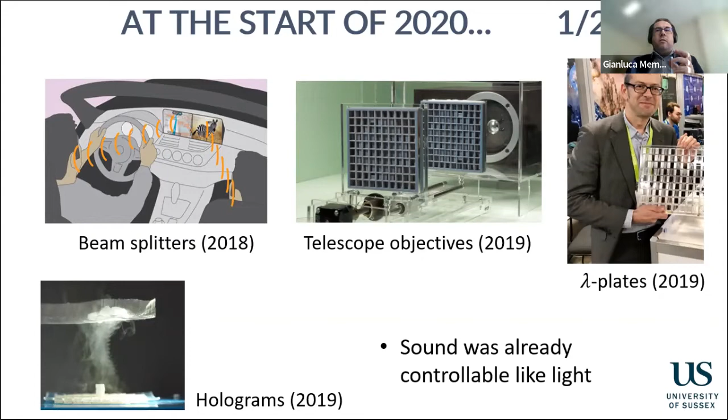And we had already realized that if metamaterials give control, then what we wanted as a company was to give control to the people whose needs in terms of acoustics management are not covered by legislation. But still, especially if they are affected by noise at work or at the office, it has a negative impact on their well-being.

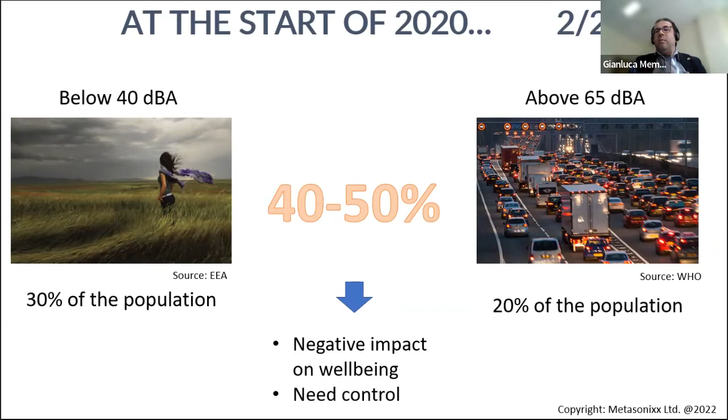And then lockdown arrived. You might remember those evenings when we were out on the front door. I remember being there with my kids, making noise for the people who were fighting the start of a war, which is still ongoing, against the virus.

And we realized this changed us. We realized that we wanted to do something now, we wanted to actually help, we wanted to be part of the war. Instead of giving noise to hospitals, we wanted to give them the benefit of silence if we could. So what we did is we spoke with KTN, and whenever you have an idea, that's the best people to talk to. They encouraged us to submit a proposal to Innovate UK. The story I'm telling you about is what came out of that.

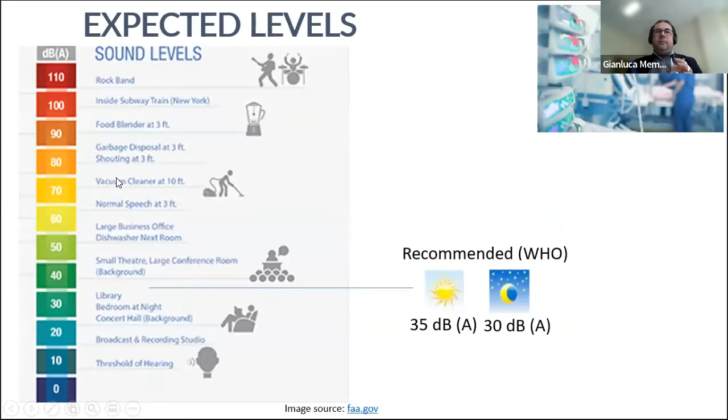Hospitals are noisy places, even if the recommended levels are very low. Low in the sense that the levels in dBs — decibel being the scale that you use to measure and compare noises or sounds, a non-linear scale — 35 dBs on average is equivalent to the sound or environment in a library where there is only the occasional shh. And if there are too many shh, then you move to a small theater or a large conference room.

If you have spent time in hospital, you know that's not the reality. In fact, a lot of studies have shown that the levels are much higher. There's a review summarizing studies made between 2015 and 2021, which says that the levels go as high as shouting at 1 meter away, or even sometimes as loud as a rock band.

My small contribution to that was a study I did in 2014 in two London hospitals. I was aware that was an issue, so one night while I was clapping, I phoned the clinicians I was talking to, first because I wanted to re-establish a link with these people who were fighting for us, but also because I wanted to know what had changed. And they told me it's even worse.

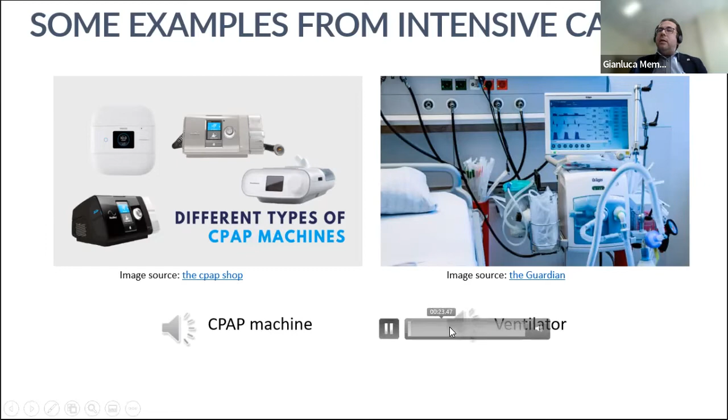Now imagine having that all the time, and imagine having a lot of those ventilators in a row. You can barely hear my voice talking. And if you add to that a CPAP machine or something with an alarm, as I was saying, then this becomes unbearable. So if you measure the noise made by a ventilator at the patient's head...

...and you estimate 10 ventilators in a standard COVID ward, or wards which were transformed into COVID wards at the start because we were unprepared to cope with the issues, you get levels similar to what you get along the M25 motorway, both day and night.

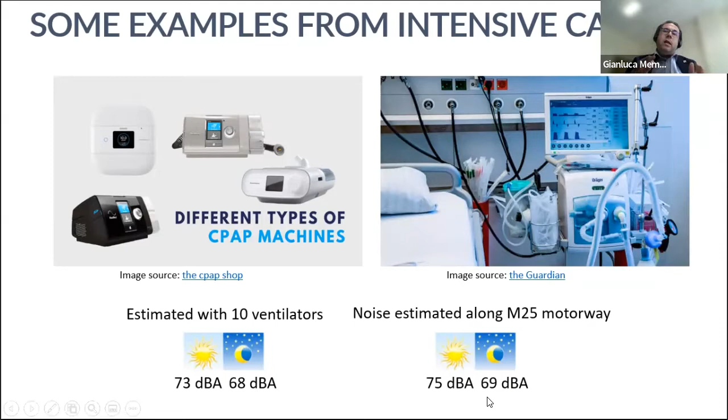So imagine working in a place like that all the time. This has an impact both on patients, because obviously they cannot sleep well. It has a proven impact on increased heart rate and blood pressure, and this also leads to delayed recovery.

But it also has an impact on staff. What you see here is the result of a survey made by the Parliament's Special Committee on the burnout of NHS staff. You can see that 2021 was clearly a difficult year. But the interesting bit, if you compare those numbers, is that the word 'noise' starts appearing more and more.

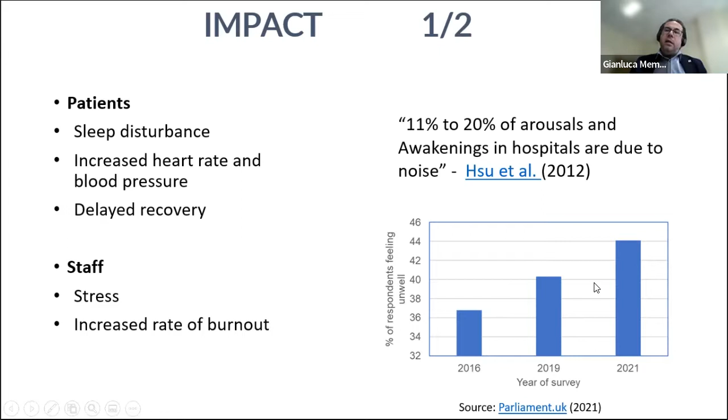The fact that noise is something you really don't want during the treatment of the sick is something that apparently has been known for a long time. There's a sentence allegedly attributed to Florence Nightingale in 1859, where she says that noise, unnecessary noise, is the most cruel abuse of care. Now, without talking, without some noises, you cannot save lives, so this is absolutely paramount.

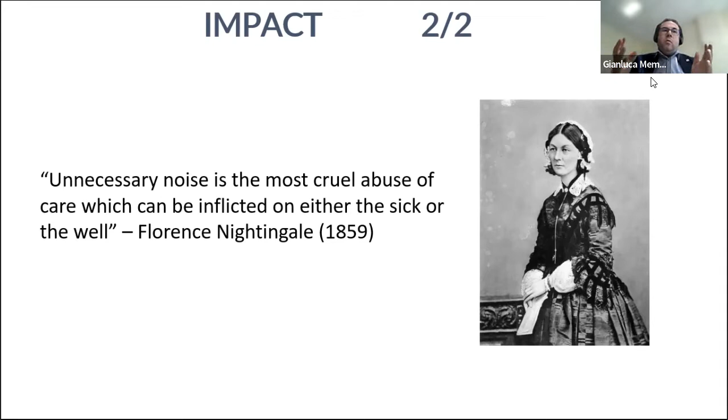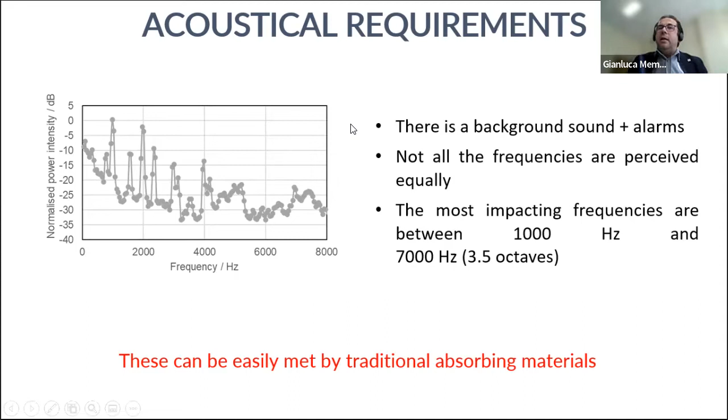So if you imagine sorting this out, you can do that with a classical solution: put an absorbing material in between, a very heavy piece of material between the ventilator and the patient. The problem is this isn't clinically doable, because anything you put between the patient and the instruments needs to be removed as quickly as possible, since you need to access the patient if needed.

Also, that was a very important point: they wanted something which would not make the patient feel like being in a coffin, so ideally something transparent. And the last requirement was that it needed to be cleanable as quickly as possible and as light as possible, so that nurses wouldn't need to call special people to manage those.

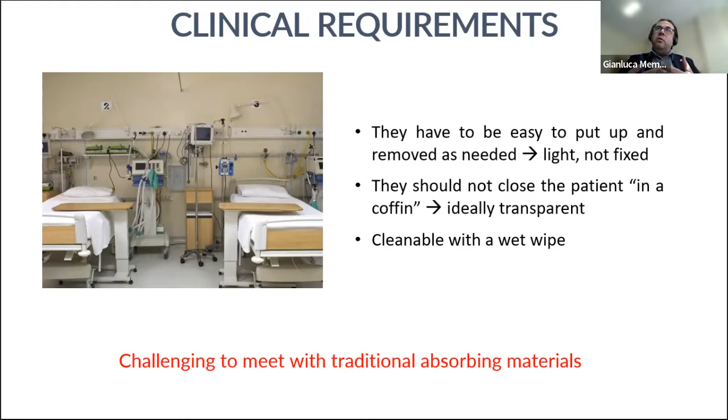Metamaterials, we thought, can do this. So for us, when I talk about Metamaterials at Metasonixx, I talk about Sonoblind Panels. These are panels which start from standard materials, or poor materials you could call them - wood, plastic, metal, paper in some cases. And then you add a bit of the patented IP and you get objects which either cancel noise or manipulate sound.

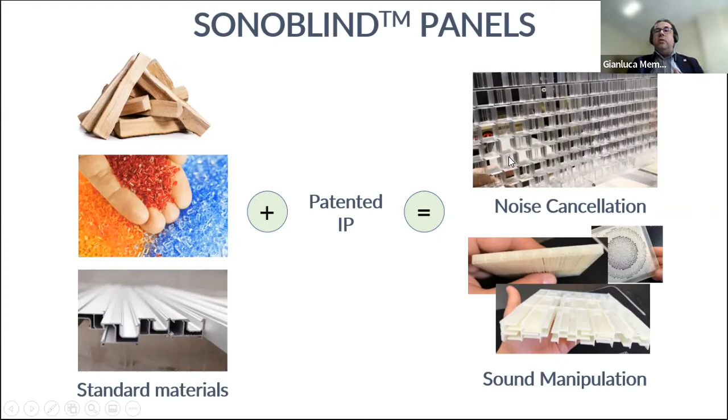So we devised in this project 3 types of panels. One of them is a panel which lets a lot of air through and is very, very effective on specific frequencies - imagine that tuned to the alarms. And believe it or not, there are some key frequencies which work for this type of instruments. So for those, we didn't look at transparency because we imagined them around the ventilator.

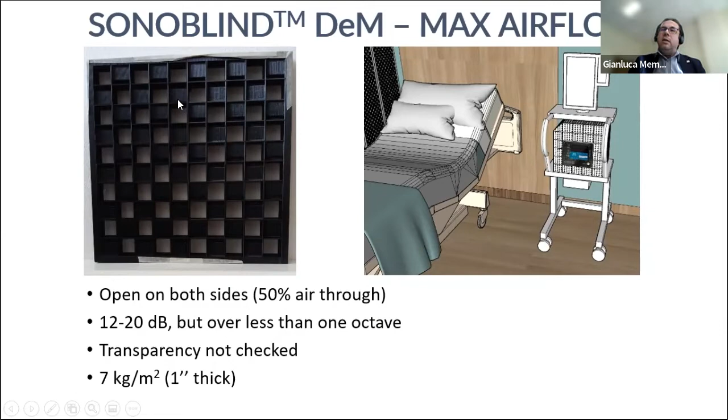These are very light because, as you can see here, most of the space is empty, and the physics which allow this to cancel out the sound is that actually the sound which goes through this and the sound which goes through this in a checkerboard interact on the other side and cancel out.

Then we took the idea of making something transparent, and also that allowed air through - remember the requirements, not in a coffin. So we designed panels which allowed a bit of air through and were more wideband, so more appropriate for the type of noises that you want to silence from one bed to the other, and also in terms of acoustic comfort. However, they are much heavier in terms of weight.

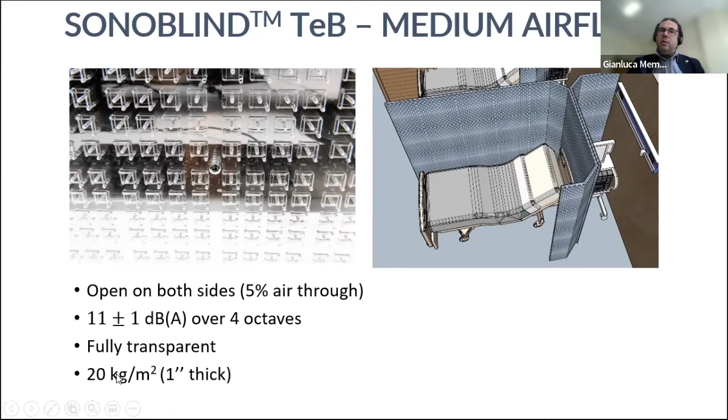And this brought us to design a third type of panel, which instead has no air through, but is semi-transparent, and is also closed on one side.

Now, strangely enough, this was the one that we imagined as on movable screens or on wheels, just like a lot of the equipment that you find in hospitals, so that you can move it around very quickly. And if the weight is allowed, you can do it with a finger.

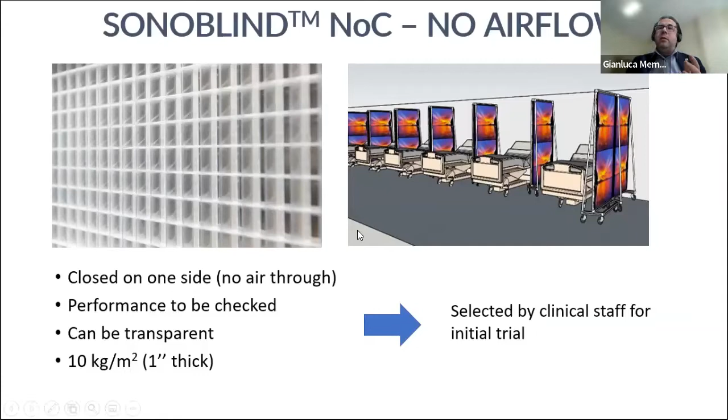So this was the first type of panels that I went to measure the first time in December 2020, and then again the next time I was allowed in the hospital was late spring, well, after May actually, in 2021. And this was the one selected for the first attempts in a ward.

So what we did then is, first we need to characterize it. Now, this is the type of panel as it looks like. The problem is that there is no standard way to characterize this object. I said that already in my previous talk, in the past session. There is no simple way that works for all the metamaterials, just like some time ago it was not easy to characterize composites.

So we use 2 techniques from the literature, used by others. And because of the tests that we did in Windows, we knew that this one here, the pulse scan, was actually traceable to an ISO standard. So we did the steps that you normally do when you try to assess whether your measurements are comparable with the method that everyone else uses.

When you have a new material and you have to give an answer, yes, but how does it compare to what is out there?

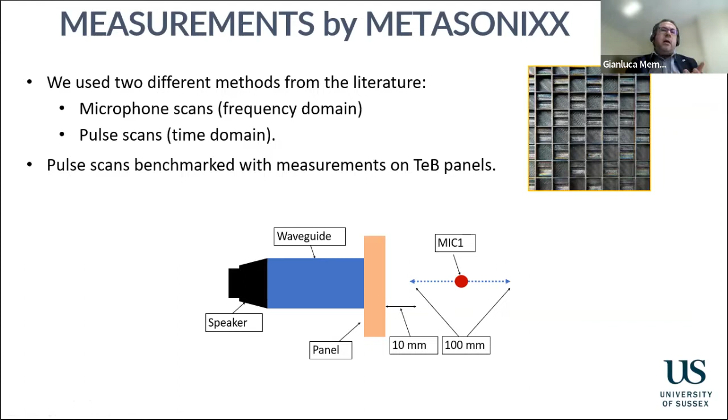But the key point is that we managed to, with a 1 inch thick panel with no air through, get better results than artboard of the same density. So to get the same effect, I would need to multiply by 3 the weight of artboard.

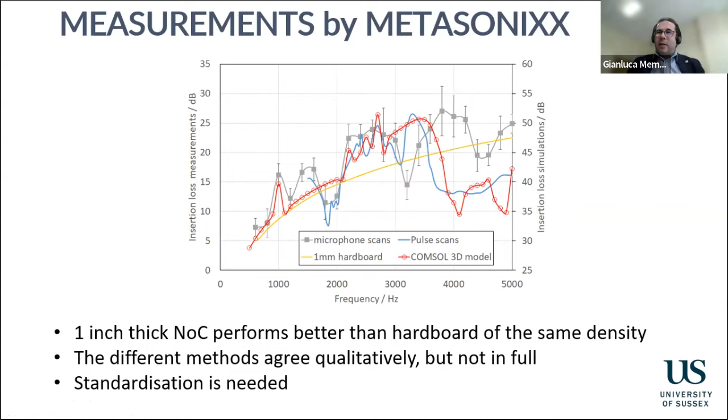So standardization is needed as a key point in my experience over the past 18 months. So we made these panels and put them together.

Given the requirement for them to be washable by wipe, at the start we decided to forget about transparency and just put fabric on top, on both sides. So we took the panel and brought it into a ward that had been arranged for a COVID patient, at a moment when another ward was being used, so they were rotated.

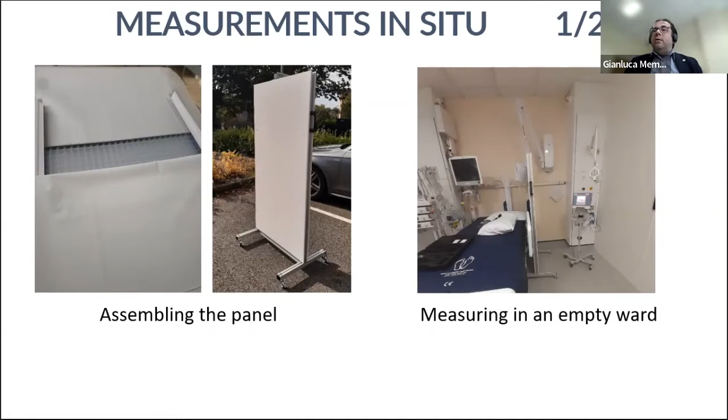We put the microphone down where the patient's head would be, and then put the panel in different positions. When you see a place like that, it's a nightmare for an acoustician, because there are reflections all over the place, so you never expect the panel to have much effect. Instead, it did - we measured 12 dBs of improvement in an environment full of frequencies that bounce and reach the patient in different ways.

Remember, we tailored this panel to a ventilator, and it worked very well with that. It didn't work as well with the CPAP machine, because the CPAP has a lower frequency component in its sound, so it needs improvement at lower frequencies.

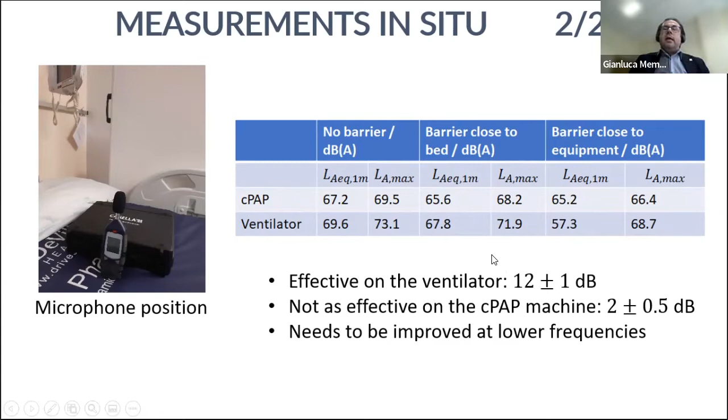So since then we talked with the clinicians and agreed that the next round in the hospitals will be later, probably end of February or March. We also tried to improve the low frequency component.

To do that, I want to show a comparison with the standard building material, which is Rockwool. I compared the performance of our panels with a 50 millimeter panel of Rockwool - remember, the weight of Rockwool is 3 times as much.

What you see is that as you change the thickness of our material by 10 millimeters, you get a response at low frequencies that isn't there for Rockwool. This shows a trend, and there are geometries which can enhance this type of solution and perform better at low frequencies.

The fact that metamaterials are tunable is one of their strengths, and I imagine Daniel will show us something in that direction, since he has a line of panels specific for low frequencies. But the key point is that wherever we're using Rockwool, or wool in general, there may be an opportunity for metamaterials to take over.

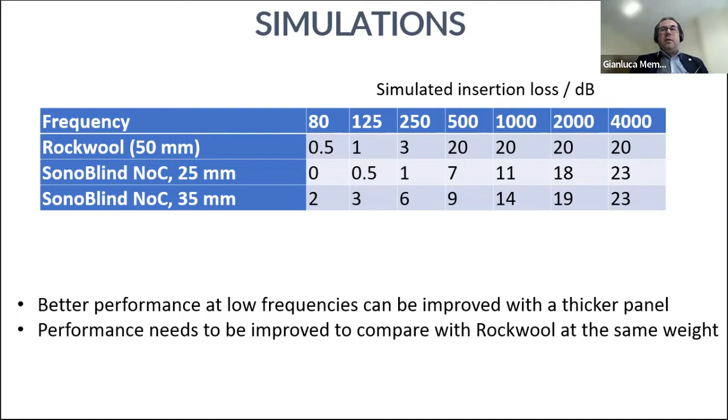I want to finish with this video, which summarizes the project for us, and I hope you'll be able to hear the audio.

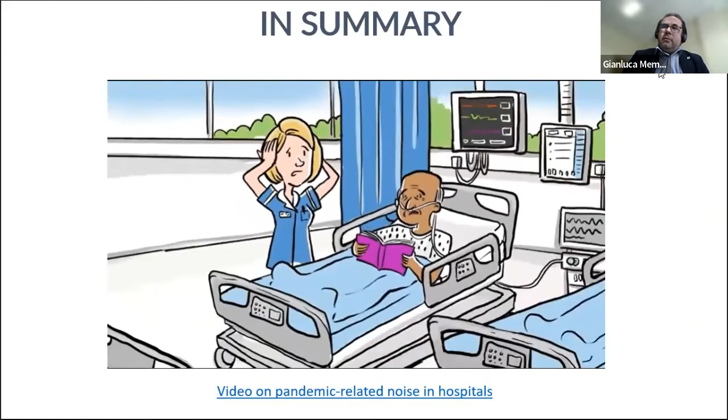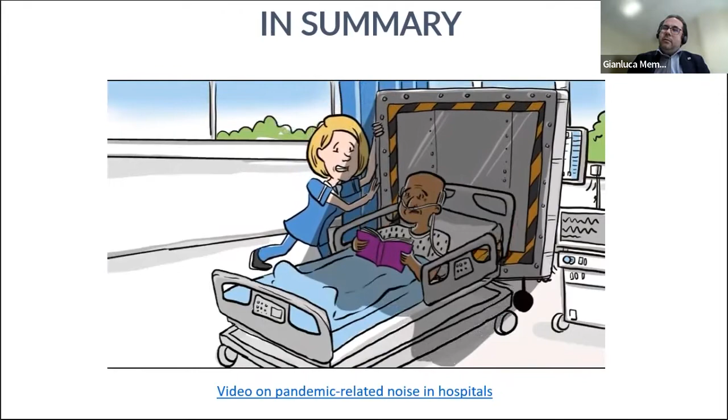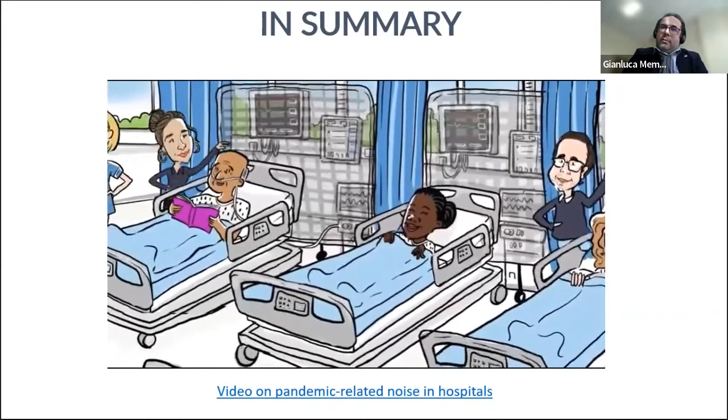Intensive care units are noisy places with alarms and machinery all around. The pandemic has made hospitals into even noisier places, with negative effects on both patients and staff. Traditional technologies cannot help - they are bulky and difficult to manage. In this project, Team Metasonixx used acoustic metamaterials to solve this problem. We designed panels that weigh 3 or 4 times less than traditional ones and can be removed when necessary. Some panels can even let light and air through. Next, applications are expected in air conditioning, automotive, open offices, and people's homes.

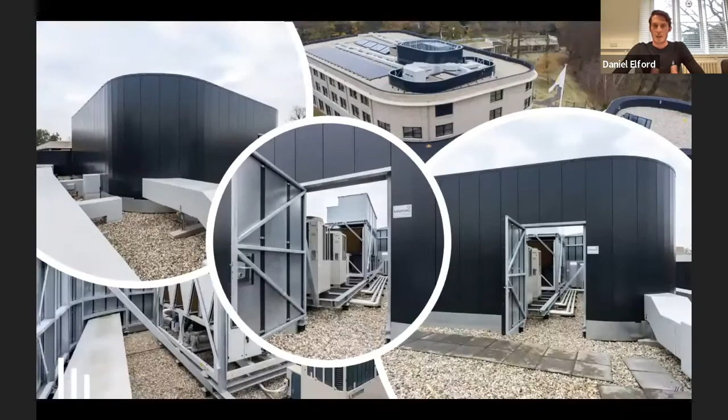So we're very well versed in delivering standard noise control solutions. The inquiries we've been getting recently are applications where you need to mitigate noise but still allow airflow for passive ventilation or cooling for different types of machinery. These are some of our standard old projects, chiller units on top of rooftops, and the only available solution beforehand was a type of acoustic screen. More and more inquiries are coming in now for ventilated facades or louvered sections of buildings to provide passive ventilation, but these have an inherent problem of leaking out low frequency noise. So you're always fighting a competing issue of airflow against acoustics.

More and more in the commercial and residential space, we're putting more ventilation products into people's houses and buildings. But again, there's an issue of low frequency noise becoming dominant because conventional type solutions work much better at high frequencies than low frequencies. This is a project we delivered last year through Merford, a ventilated loggia on the side of a building, but again low frequency noise is not as mitigated as the higher frequencies. So what we're seeing is a big problem with low frequency noise.

So what we developed at Sonobex is a new product called NoiseTrap Blox, which is a metamaterial based solution. We wanted to allow passive ventilation for airflow, for cooling and natural ventilation of buildings, but focusing on improving that low frequency performance, where standard solutions like acoustic louvers or silencers don't really work very well at low frequencies. The goal to develop this product was also so it was modular, so it could be assembled by hand on top of rooftops for chiller units, for example. A metamaterial has the benefit of being lightweight because it's not based on the mass law, which conventional acoustic solutions are based on.

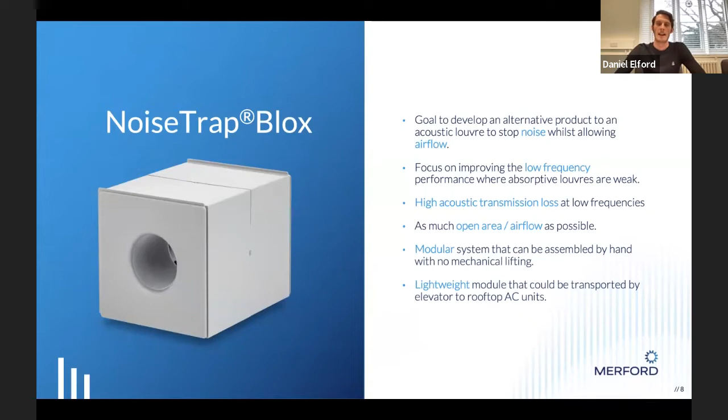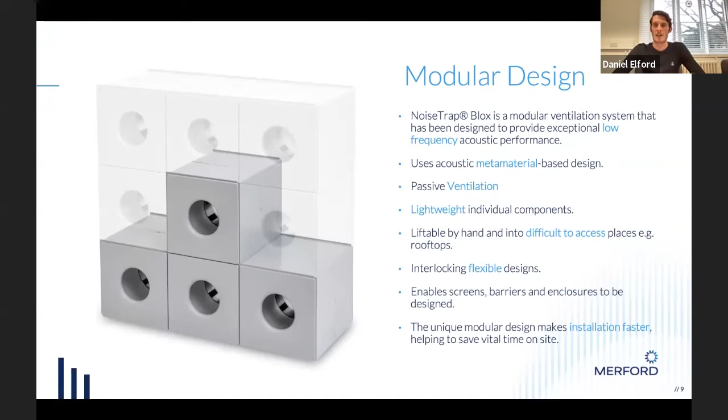So that's what we did. We came up with a modular NoiseTrap Blox solution. We've fully lab tested this now, and we have enhanced low frequency performance compared to conventional type solutions. Like I said, it uses a metamaterial based design. What it actually is, is a closely coupled resonator array that allows passive ventilation and maintains that lightweight ability to be installed on rooftops. We've also developed this product so it can be rapidly injection molded, creating flexible designs. So we can now create screens, barriers, enclosures, as well as the standard louver type acoustic solutions in the market.

There's some nice pictures of our systems. Like I say, it's an injection molded plastic solution with no acoustic material contained within, to mitigate low frequency performance whilst providing passive ventilation.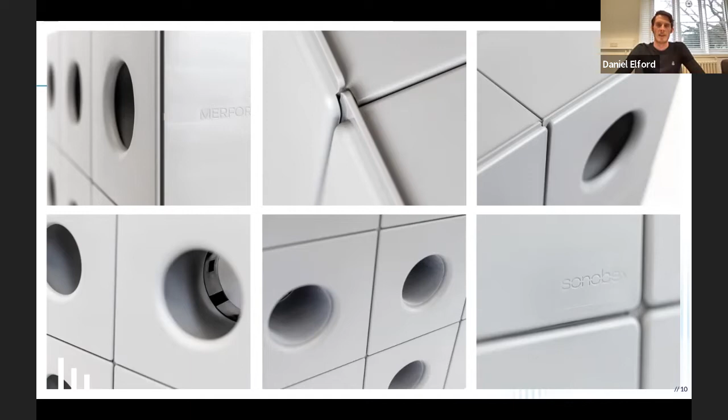I just want to put this in perspective. Our new NoiseTrap Blox product is on the left here, and our standard conventional solution, which was an acoustic louver we call the AKR 300, is on the right. What I want to highlight is the acoustic performance at 125 Hertz: we get 18 decibels in that full octave band, whereas the conventional standard solution only gets around 5 decibels. The overall performance of the Rw value is pretty much comparable because we boost the low frequencies there.

We also have a better airflow requirement than conventional louvers, which infers a lower pressure drop value, so you have better airflow for a certain open area with this product. With the same thickness or depth of the solution, we are actually half the weight and half the cost, with significant low frequency acoustic performance and equivalent overall performance. To put it into perspective, the 300mm deep NoiseTrap Blox is equivalent to a 2.1 meter long parallel baffle silencer, which is another standard solution you get in the market.

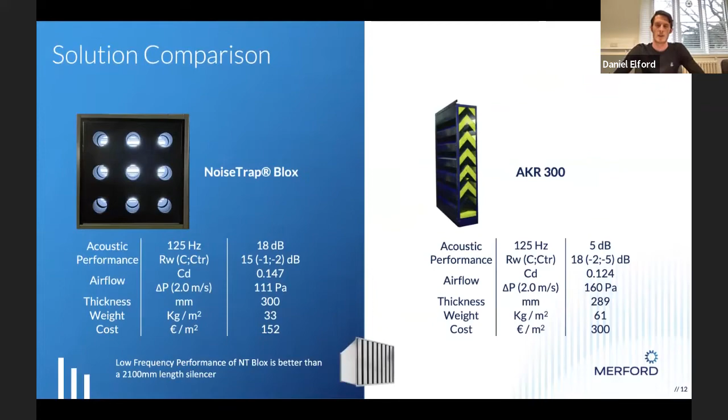So one market we've really focused on is where you need airflow and low frequency mitigation in commercial and residential applications. And there's been a lot of news recently about the heat pump and chiller markets.

By the end of 2030, around 60% of the world's population will actually live in cities. In the UK, they are really pushing heat pump technologies to provide heating for houses, for example. Nearly 25 million households purchased a heat pump in 2020, and that market is ever growing.

But because people live very close to each other, as soon as you install a heat pump outside your house, you get an increase in noise complaints. And 15% of all UK properties have no outside space, so you then have to mount them on the side of your building, usually outside your bedroom window, which causes noise issues.

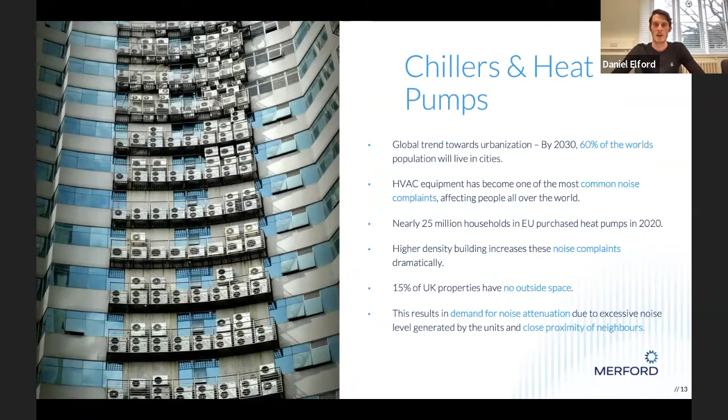A heat pump is generally quite loud if it's very close to your window. And if all of your neighbours have these, noise levels increase because there are multiple units installed on the side of a building.

The main sources of noise from a heat pump are the compressor, which is low frequency noise, and the fan contained within it, which is more broadband noise. It's easier to mitigate that higher frequency fan noise, but you have a tonal penalty that can be applied because of low frequency tones generated by the compressor. And because a heat pump is an intermittent noise source, you can get a further penalty of 3 decibels applied to certain frequencies, which makes that problem even worse.

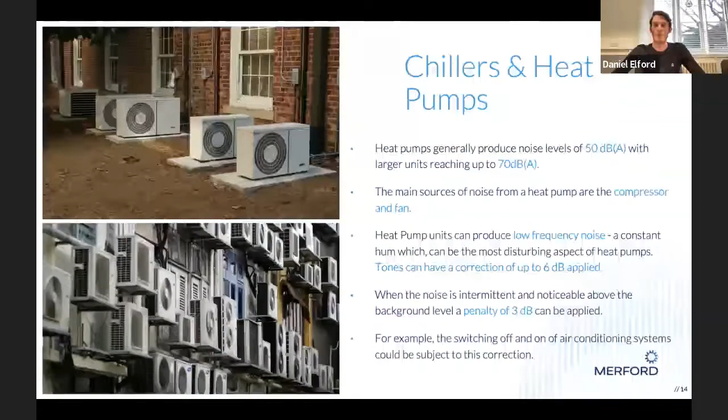The current state of the art in the market prior to metamaterials was to make silencers and louvers bigger and longer, to have more mass in the way to mitigate those low frequencies. But that inherently creates a new problem with planning — you can't really install over a certain height on a rooftop if there's visual line of sight to a chiller unit, for example.

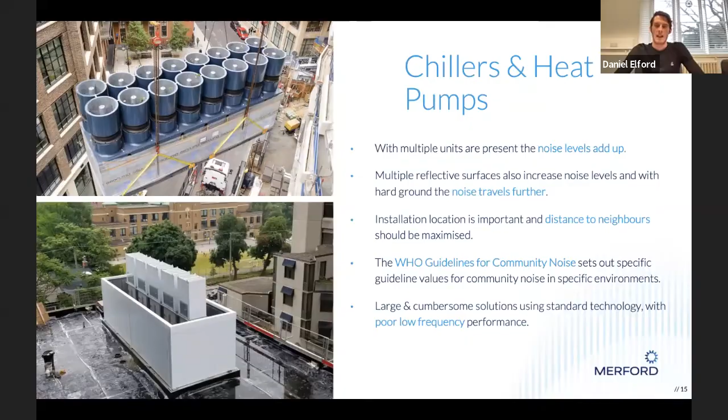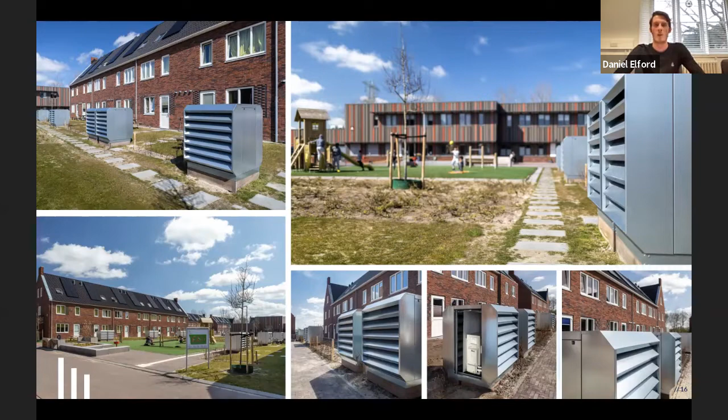So what we've done at Merford Group — this is a standard conventional louvered product. It's a growing market to mitigate heat pump noise, but these types of solutions didn't really work at low frequency. We found this out during a number of installations of these standard louvered products, which provide airflow while mitigating some of the mid to high frequencies.

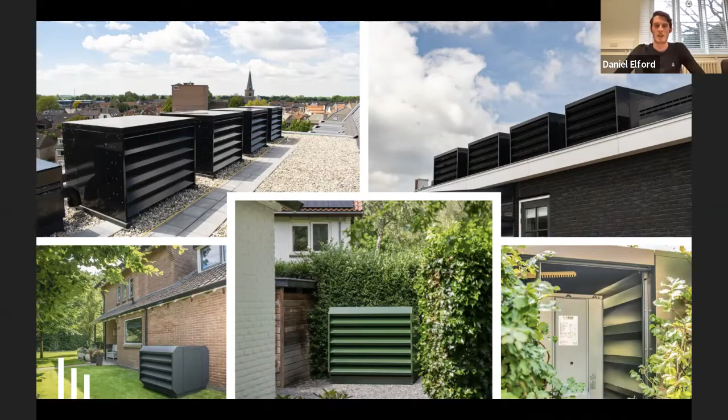We have a number of solutions to try to integrate these into the built environment, so we have integrated rooftop enclosures now, as well as other types of solutions. But the common problem with all of these was that low frequency performance — we still had an issue with that.

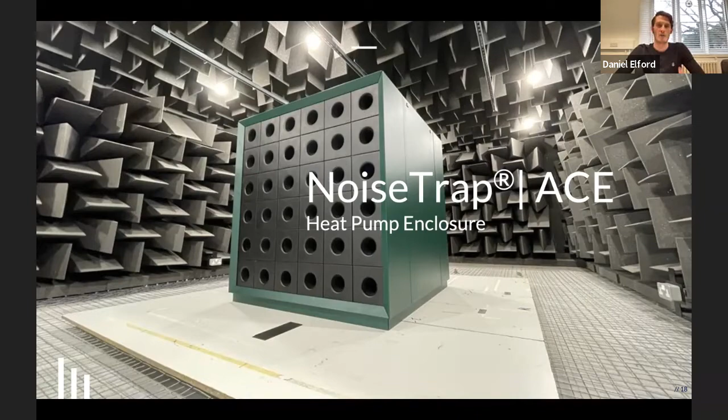So what we created here at Sonobex is the Noise Trap Ace, which is our heat pump enclosure. It uses our NoiseTrap Blox product to allow passive ventilation and low frequency noise attenuation for heat pumps.

It works on a combination of three clear principles. We have metamaterial based noise cancellation, and that is in the ventilation aspect of it. But for security and maintenance, the remainder of the enclosure is constructed out of standard acoustic materials — sheet steel with mineral wool to mitigate the other higher frequencies.

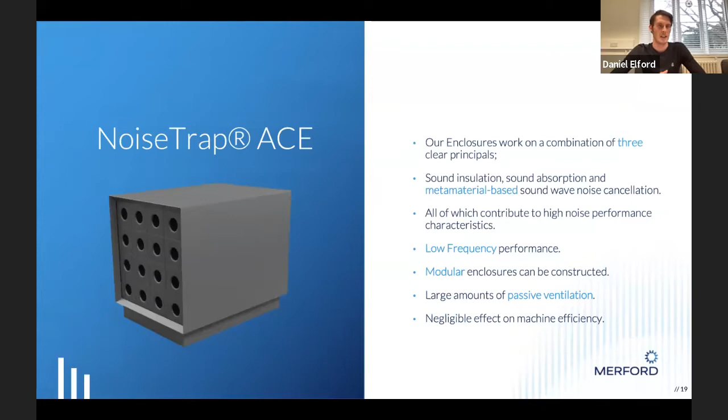This solution is actually much better at low frequency performance. It's a modular enclosure, so we can now service different size heat pumps, different power ratings, and different types of chiller units. We've fully tested this in environmental chambers, and there is negligible impact on the machine's efficiency, due to the airflow properties created through our metamaterial.

We can now predict the real world performance of what you'd get on a standard type of heat pump. And why we were limited in terms of performance at low frequency is due to the fact that the roof on top of this enclosure was made out of standard materials — so that was a weak spot there.

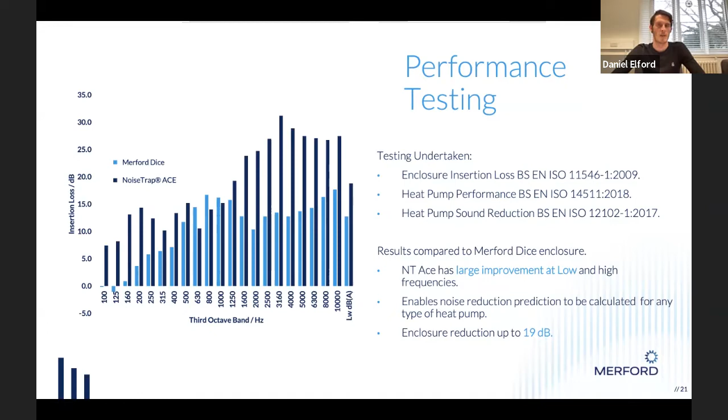I will summarize with some take home points. We can provide low frequency attenuation with natural ventilation. There are a lot of applications for that, but we're really focused on the heat pump market, which is growing. Our NoiseTrap Blox solution is completely modular, lightweight, liftable by hand, which enables flexible designs. That also enables us to be installed faster on site, which saves costs in the long run.

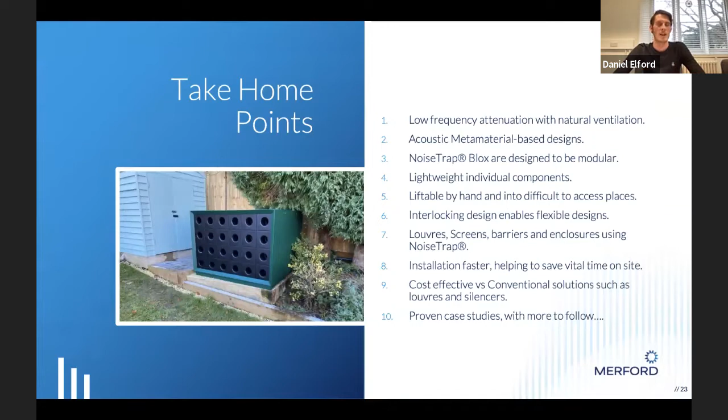This was a picture of our latest installation on a heat pump unit, using our Noise Trap ACE, again completely mitigating the low frequency performance which comes from the compressor inside that heat pump. That takes me to the end of my talk, and I'll be happy to answer questions after the following talks.

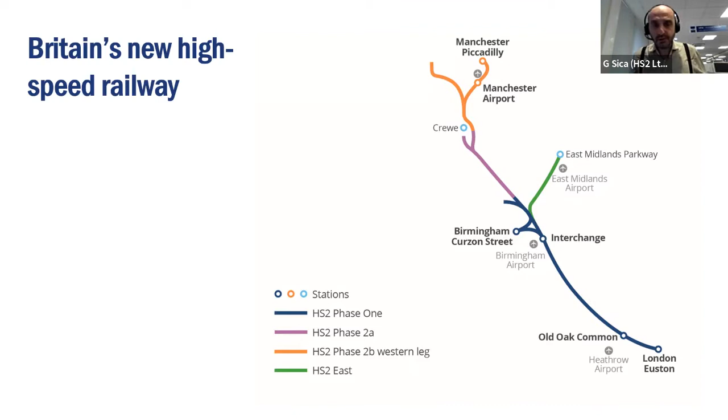Now HS2 Phase 1, which is the line in blue on this graph, is in construction. Then we have HS2 Phase 2A, which is basically the bit of the railway linking the West Midlands to Crewe, and this one is really moving towards delivery. Then we have the Phase 2B Western leg, which we just deposited the hybrid bill a few weeks ago. This gives you a feeling of the scale of the project, but also that there is quite a big opportunity here to improve the methods for controlling noise and vibration.

When we talk about HS2 and the sources of noise on the scheme, I think HS2 is not just about railway noise. Of course, we have operational noise, which is given by the railway and any altered road and rail generated by the scheme. We also have a big amount of stationary system noise, coming from mechanical or electrical equipment, which can be a vent shaft, transformer, cabinets, or other plant. Also, we have HS2 stations and buildings for which we need to deliver acoustic comfort to passengers and staff. And likewise, we have trains where interior noise needs to be controlled in order to deliver a good passenger experience.

And then, of course, we also have ground-borne noise and vibration generated by the railway.

We also have different kinds of noise, which go from broadband to tonal content. At the moment, I think the metamaterials that are currently in the market tackle more tonal kinds of frequency, but the industry is also working hard to develop something which works for a large band of frequency.

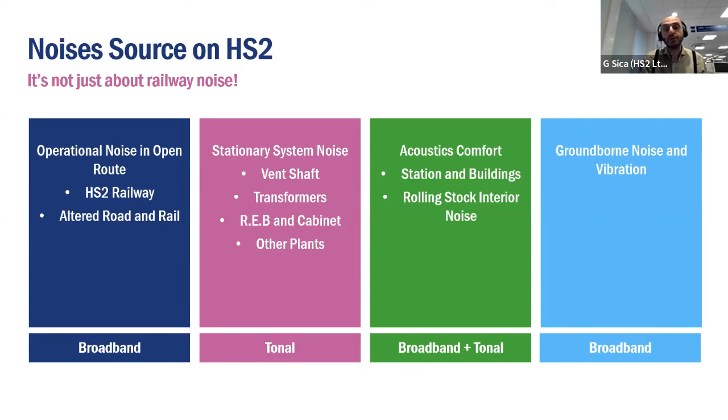So let's go through some of the challenges where we could see application of metamaterials. We have stationary system noise, which is generally tonal or narrowband, generated by mechanical or electrical interaction. As pointed out by Daniel before, low frequency is very difficult to mitigate, and it's also annoying to residents.

We also need to consider a lot of non-acoustic constraints, like the need to provide ventilation, and also the level and nature of sound produced might depend on the source, which could be a transformer, a ventilation shaft, or a chiller on top of a station.

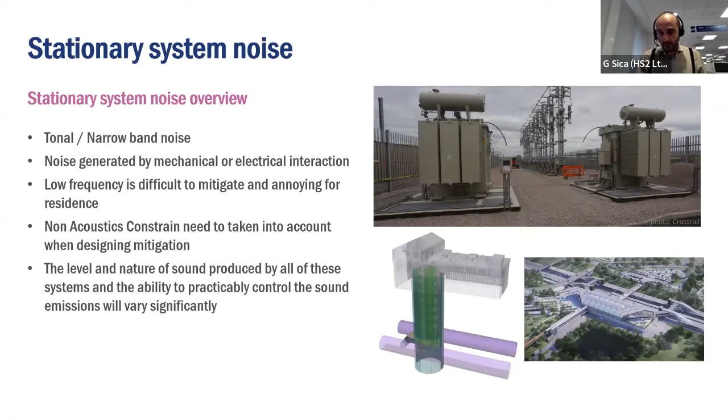So if we go through the challenges we could foresee for an infrastructure project, there is a common example of a rail system compound, which generally includes transformers or cabinets, and these need to be very close to residents. It is not enough to mitigate the noise level at the source.

So, as shown before, we need to provide an enclosure in order to mitigate noise, while at the same time providing ventilation.

These generally have a minimum design life of 30 years, while sometimes an asset can have a design life of a maximum of 120 years. So the challenge for the industry should be to have a material which has high acoustic performance compared with the state-of-the-art, but without compromising all the other requirements.

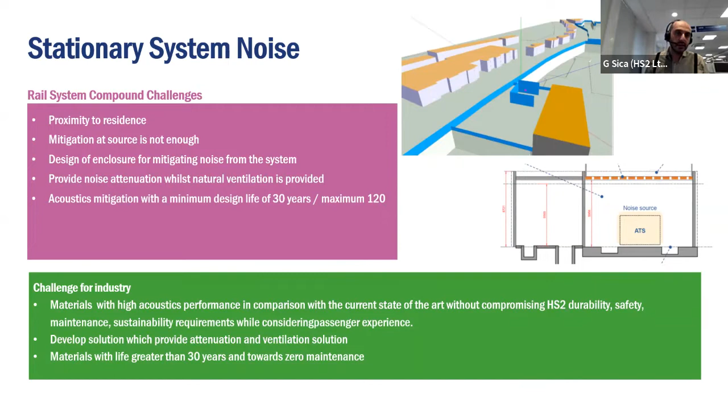A similar scenario could be a vent shaft that is very close to residences, where again we cannot mitigate the noise completely at source, so we need to provide higher attenuation at low frequency.

Of course, even in this case, there are a lot of non-acoustic constraints. Again, the challenge for the industry is to have a material which doesn't just perform well acoustically, but also meets all the other conflicting requirements, and in this case, works very well at low frequency.

And always try to extend the design life of the project and the material, and also have a material with minimum or zero maintenance.

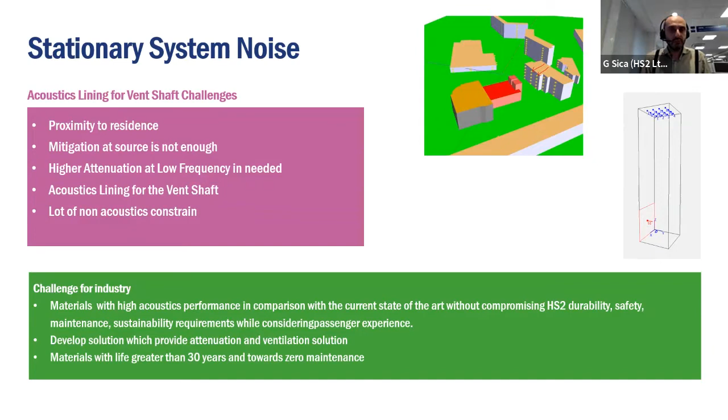Another example that I think could be quite interesting is ventilation systems, which are generally big fans, which can be of two types: an axial fan and a jet fan.

Generally, for attenuating the noise at the source for these fans, we need multiple attenuators, and sometimes these are very big, and sometimes also very difficult to maintain.

This is because, especially after you grind your rail in a tunnel, you use the fan for extracting the material, but then all the material sticks onto the attenuator.

So again, in this case, the challenge will be to have a material which reduces the space while keeping or improving the acoustic performance—something which is smaller and performs equally well or better.

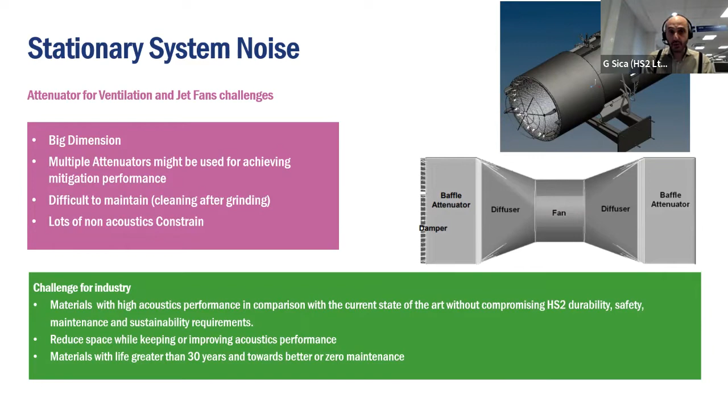We also talked about acoustic comfort. For example, one issue you've seen in literature is that...

When you have a train running within a tunnel at high speed, there is an increase in interior noise. Generally, this increase is 6 dB, which is quite a lot, considering that loudness doubles with each 3 dB increase.

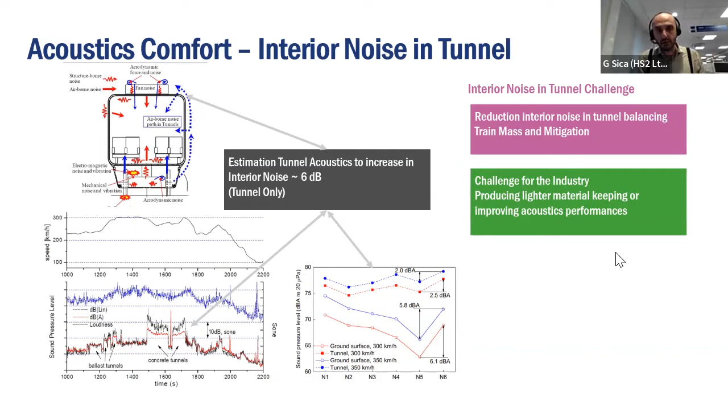So in this case, the challenge we have is to have a material which reduces interior noise, but balancing the train mass, because, like Gianluca said in his previous talk, mass plays a big role in attenuating noise. Of course, we cannot put a material with a lot of mass on the train, because this will have an effect on, for example, the energy performance of the train. So the challenge will be to produce a lighter material for keeping or improving acoustic performance, but without having a knock-on effect on other requirements.

Then, of course, we have operational noise in open route, which is a broadband noise. The noise sources increase with speed, and we know that above 300 km/h aerodynamic noise becomes relevant, while rolling noise is still present. Aerodynamic noise is generally generated by the top of the train and from the body of the train, so from sources 1, 2, and 4 in my picture of the train, while rolling noise is generally source number 5, generated by the wheel-rail interaction.

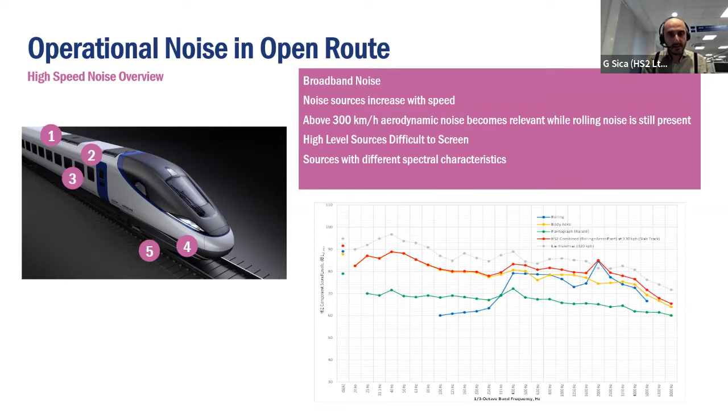From the graph here we can see that each source has a different spectral characteristic, and since the sources are positioned in different parts of the train, this might lead to a more intelligent way of designing noise barriers, considering the presence and position of the source. So here there is a challenge related to civil mitigation design, which is not just noise barriers, but earthwork, retaining walls, cladding, and tunnel portals.

Here again, the challenge is always to maximize barrier performance while minimizing visual impact, because no one likes to have a very tall barrier in front of their house. Another challenge is to push the minimum design life of the material in order to match the design life of the asset.

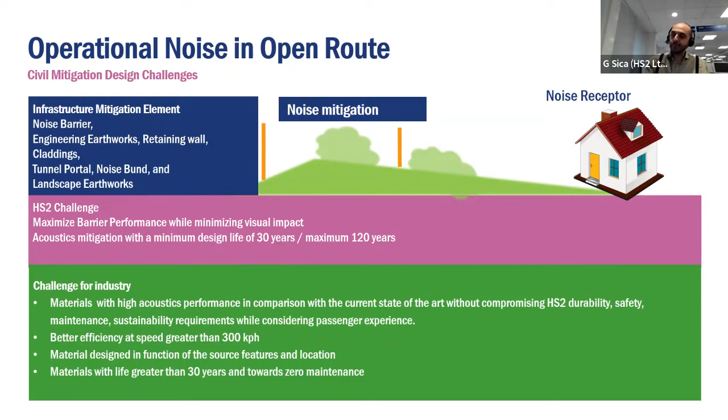Generally, most of these infrastructure assets have a maximum design life of 120 years. So in this case, the challenge for the industry is to have a system with better efficiency at speeds greater than 300 km/h, to design material as a function of the source features of the location, and to have something with a design life greater than 30 years, going towards zero maintenance.

The last but not least challenge that a big infrastructure project might have is noise insulation at receptor locations, which is generally offered as a last resort for mitigating significant effects from construction or operation of the railway or any other infrastructure. Sometimes we need to provide a ventilation system for ensuring air circulation within the property, especially when the windows are closed.

So as already seen in the work done by Gianluca, and to a certain extent by Daniel, developing material that gives acoustic insulation performance while providing natural ventilation could be a good improvement, and also throwing into the mix the element of transparency, so to have windows which basically insulate noise but allow natural ventilation. And this is the end of my presentation.

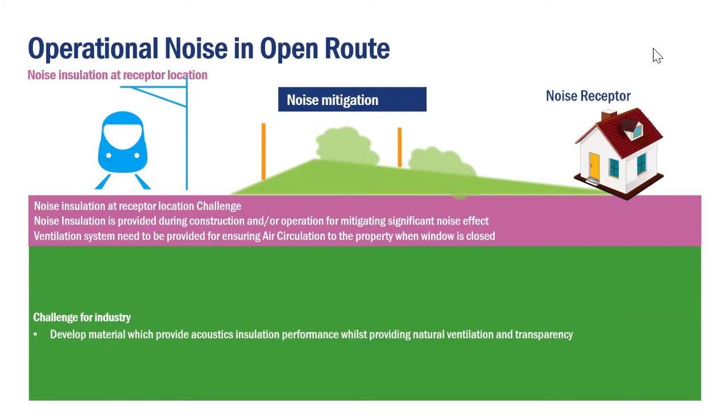Hello, give me a minute to pull up my slides. So I'm Chief Science Officer for Metamaterials. We're a publicly listed company on NASDAQ, and my role is to oversee the R&D programs in the company. Today I'm going to present a particular technology and application that is applied to buildings and indoor environments, but unlike the other speakers, it's on electromagnetic waves, not on acoustic and sound waves.

However, the application area... Sorry, Themos, to interrupt. Your microphone is crackling quite a lot. I don't know if it's touching your clothes or... Yeah, let me reset one moment.

Is it better now? Yeah, that's perfect. Thank you. Okay, sorry, this wireless technology is not very good. That's why we're trying to improve it. Okay.

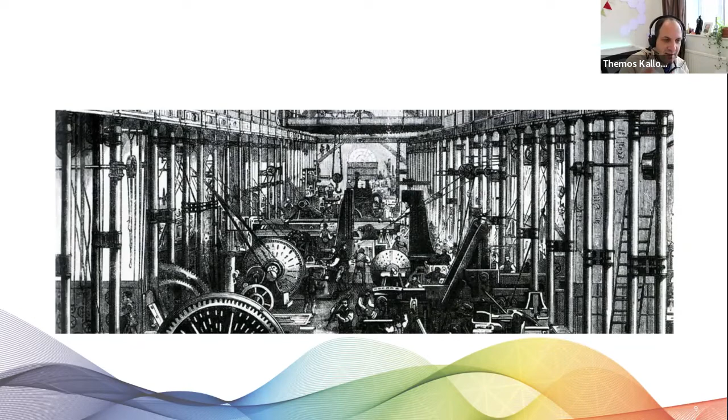In addition to this, we're heavily focused on manufacturing, trying to fabricate metamaterials at scale. Humans have done this before, twice relatively recently: once with the industrial revolution in the 1800s, where for the first time people started building stuff at scale and building machines to build the stuff. Also in the electronic space with silicon and transistors, we went from a discrete few number of transistors to having tens of billions of transistors in a very small area now. This took decades to get to a point where you can make these things cheaply and very efficiently.

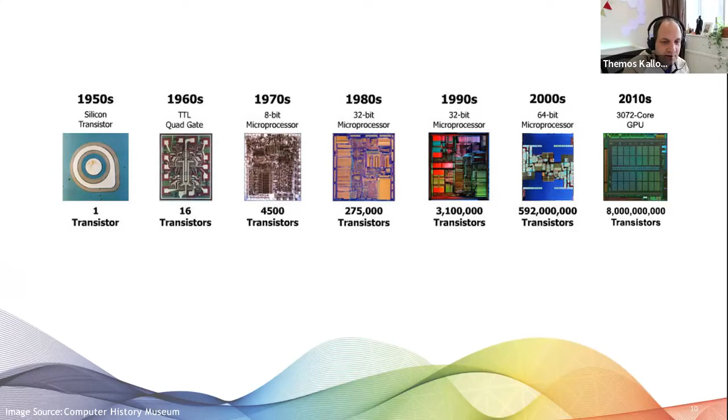And that's what we are trying to do with metamaterials. I'll go briefly through some example applications that we've been working on.

We started our first product in 2019, still on sale on our website, which is laser protection eyewear. This is targeted for the aviation industry and pilots. It uses holographic films in order to reflect a particular wavelength of green laser light that is used for laser attacks against aircraft with laser pointers.

We also have biosensing metamaterials. The idea here is that there's a thin film you place against the skin, and it acts like an anti-reflection coating for the skin, but for medical radio wave applications, so it would allow more energy through the skin.

We're also active in the plasmonic space for security features, those nice colorful patterns you see sometimes in banknotes. If you got your hands on a Euro Cup ticket that took place last summer, it had one of our patterns on it, the actual physical ticket. This is done using lithography techniques to print on these materials.

We also have activity in transparent conductors. We're good at making transparent antennas, from design to fabrication, and we can make indoor television and 5G antennas with transparent conductive materials. Now, the application I wanted to talk more about today was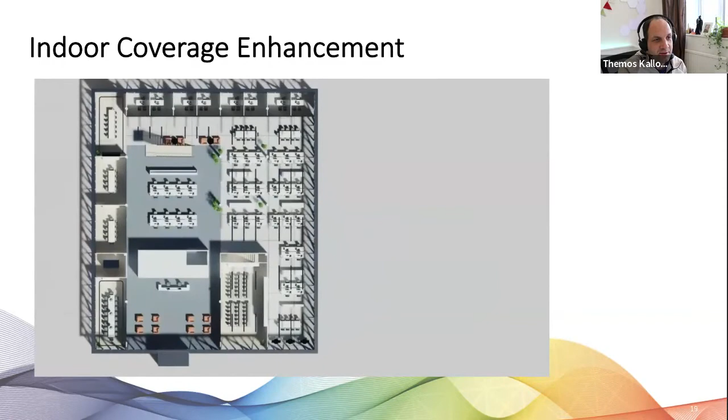This can also be done for indoor environments, redirecting the energy inside by placing this film on the window. I have a little video here to show you, from our partners Sekisui in Japan, demonstrating the concept of how this would work. I'll let the video play, but basically we assume an antenna on the outside and then different films installed in various areas indoors to redistribute the energy in places where you would otherwise get little to no reception.

So that's the vision we're trying to get to. This is especially important with smart buildings that are filled with different sensors, IoT devices, and so on, so that there is seamless connectivity in all of them.

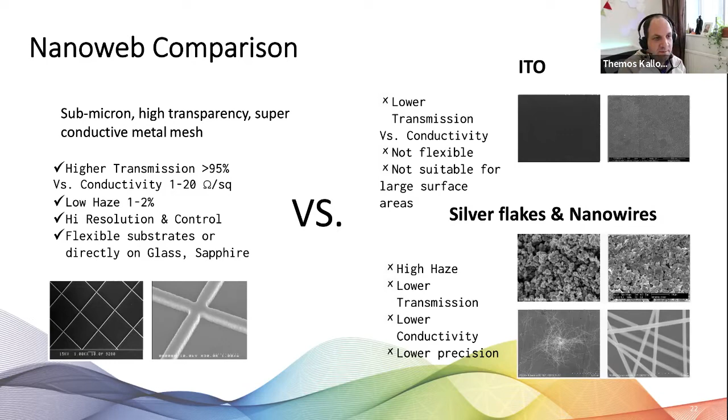There are other materials that do similar functions. ITO is the most common one currently used in most mobile phones. There are also silver flakes and other types of nanowires. The difference with nanoweb is that we have much more control and can imprint metamaterial designs beyond a simple mesh, which is something you do not have control of in other chemical solutions and random wires. Because of that, we have a material with higher transparency for a given conductivity.

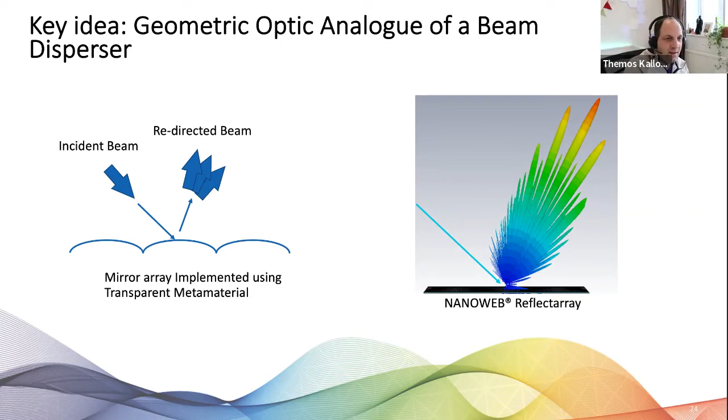Now we take that and design it to perform a certain function to redirect electromagnetic energy. Basically, we can implement, for example, a mirror array using this transparent metamaterial. In geometric optics, you might have a shape like this on the left-hand side. We're mimicking that shape by using a completely flat metamaterial pattern, a reflect array.

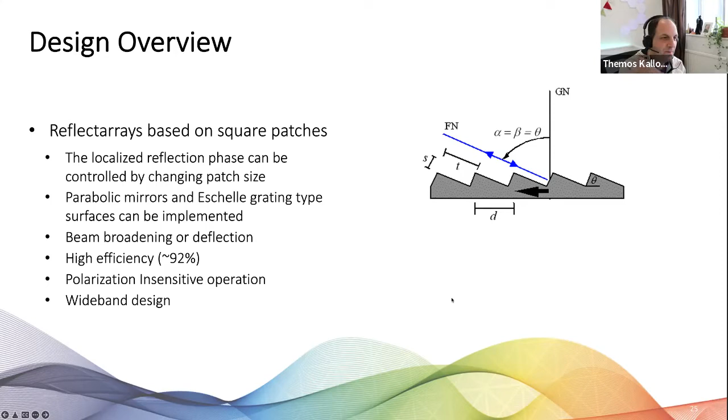One way to design this is to use a blazed grating type. These types of gratings are well known in optics, and they can disperse and reflect energy at anomalous angles. We're basically implementing this type of function, but with these metallic patches of nanoweb.

I'll show you a simulation here provided by our partners at Sekisui. On the left-hand side, you have two corridors that meet at 90-degree angles, with a transmitter on the left-hand side. Right at the junction, you place the nanoweb material to reflect and redirect the energy into the room and the back.

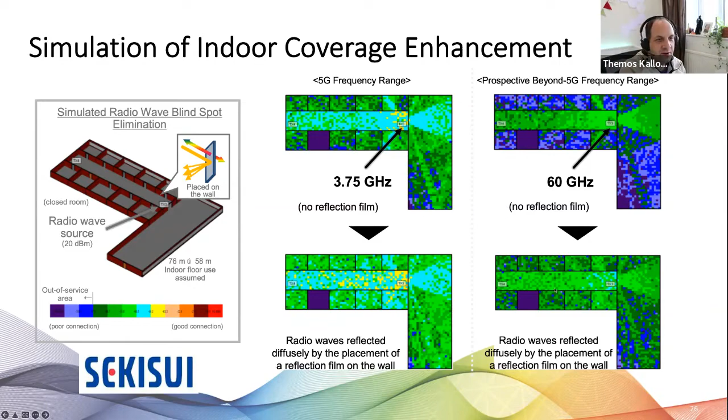You see the simulation results on the right-hand side at two different frequencies, 3.75 and 60 gigahertz. The top row is without any reflector, where you get poor reception at the edge of the room at the back. But if you add this reflecting film, you get much better reception, much more signal at the back. This is also dispersing the signal, so it can expand the beam, not just reflect it.

So it doesn't act like a mirror. The key point is that you can basically make different films for different angles and redirect the energy as needed.

I'll close off by explaining how we manufacture this, because a lot of this stuff can be done with e-beam tools, but we've actually invested a lot of effort to do this faster and cheaper. We are focusing our effort on films that have small feature sizes in large volumes and at low cost.

There are a couple of ways to fabricate these things. The first one is what I call the interstellar method. You can take an e-beam tool, send it into orbit around Earth, and if it goes fast enough, due to time dilation, when it comes back much less time would have passed on Earth, and then you'd have these things on time. However, this is not very realistic.

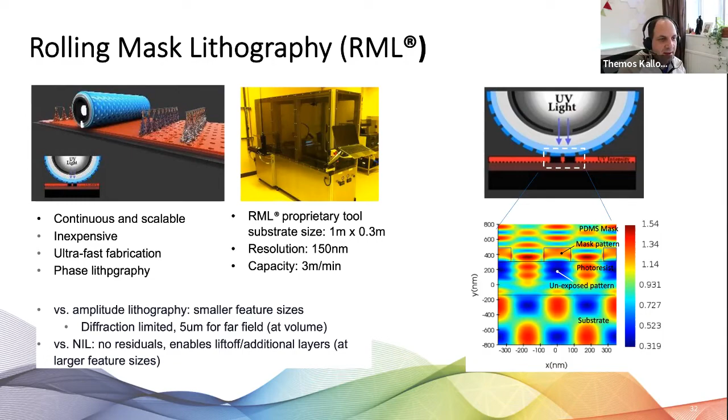Instead, we're using a method called rolling mask lithography, where the pattern of the film is on a cylindrical mask that is then exposed over a photosensitive material. This allows us to do roll-to-roll fabrication of these films. These are some of the patterns that can be made with this technique. We can do different kinds of features, including the nanoweb and deflector type elements that are interesting for this application.

We currently are setting up this year a roll-to-roll rolling mask lithography tool in our California facility. So these are the main steps: we start with the rolls, do exposure with the light, then there is a baking process step, then it is developed, then we deposit the metal to create the layers, and then there is a lift-off and protection integration. All this was done in a small scale, and now we're building the capability to do this in rolls at a time.

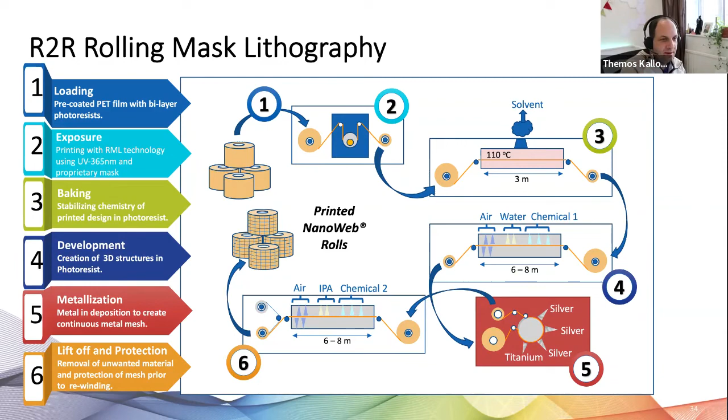A sister manufacturing technology we use for the same purpose is in our Canadian facility. This is nano imprint lithography technology. It is complementary to the rolling mask I explained before, but is also used to fabricate roll-to-roll structures with nano size features at large volume. So we're aiming around 7 million square meters per year capacity in order to address this and other needs of functional films. And that concludes my talk.

Thank you very much for your attention, and I'm open for questions.